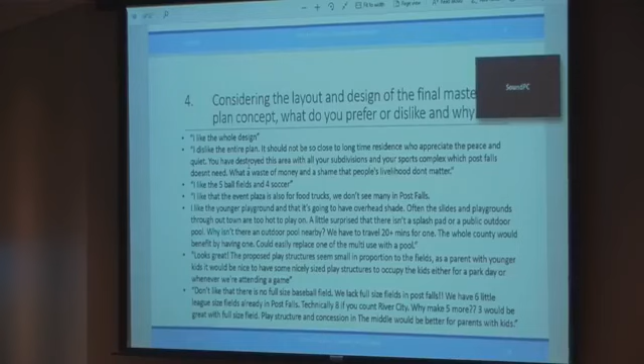Shelters at 7%, and the event plaza at 7%. So what I tried to do is, and this is included as an appendix to the whole master plan with all of the quotes and comments we got from everybody that responded, is pick a short list of comments on considering the layout and design of the final master plan concept.

The first comment I put is, I like the whole design. However, the second one is, I dislike the entire plan. So you can see the range of comments we got. People were not afraid to tell us exactly what they think.

Some of the comments related to how close this complex would be to existing residential and the relationships as well. So that's a concern.

I like the 5 ball fields and 4 soccer fields. I like that the event plaza is also for food trucks. We don't see many in Post Falls.

And then we get comments about, you should build a pool, which I'm sure you guys hear all the time. All the other things you've heard during your master planning for your parks and recreation master plan process came through in this as well.

One of the comments was, and we wrestled with this in the design, that there's no full-size baseball field. So we wrestled with what this complex should be, and as we worked with staff, we came down to 5 youth baseball softball fields.

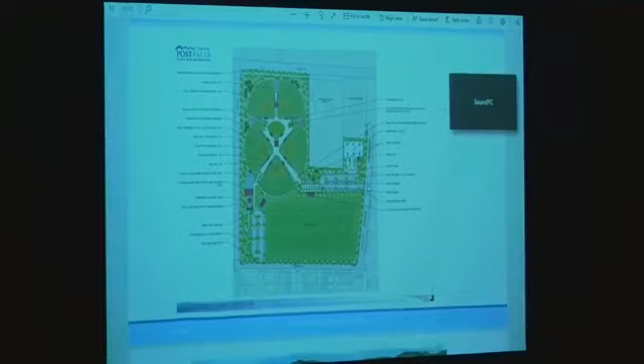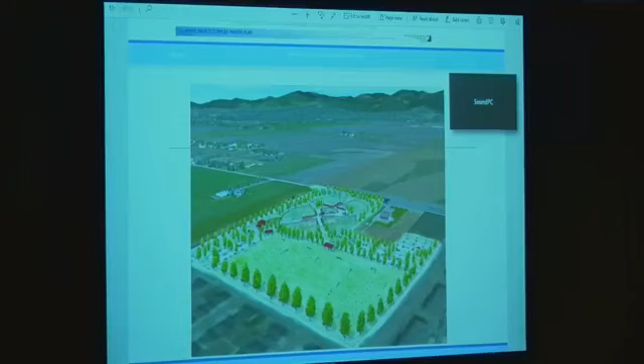This gives you an idea: Prairie on the north, fitting into this slope on the north and west, and the fields across the south with the existing residential neighborhood looking out onto the fields, and then the apartment complex here also looking out on the fields, with the main portion of the activity, at least for the baseball and softball fields, up here in the northwest corner.

So a little bit more detail. The way we've designed the master plan right now, the 5 baseball and softball fields all have synthetic turf infields. We've estimated it that way.

One of the things that does is extend the season, both on the front end in the spring and the back end in the fall. It makes it so you can have practices earlier in the year, and also reduces the maintenance turnaround time between tournament games. So if you have a late afternoon thunder shower or something, it's easy to get right back on and play without having to prep the infield. That's one of the things we did.

Each of the 5 fields are 225 feet to the outfield. They're set up to have 60-foot and 70-foot bases, so we have flexibility for different age groups.

And then again, the ADA inclusive field is in the center. We're showing net backstops so that the visitor and fan experience isn't looking through a chain link fence like in a lot of situations. The net is a lot easier to see through.

Restroom concession stand, I'll show you the details on that. We're really excited about how the architecture and character of the complex are coming together.

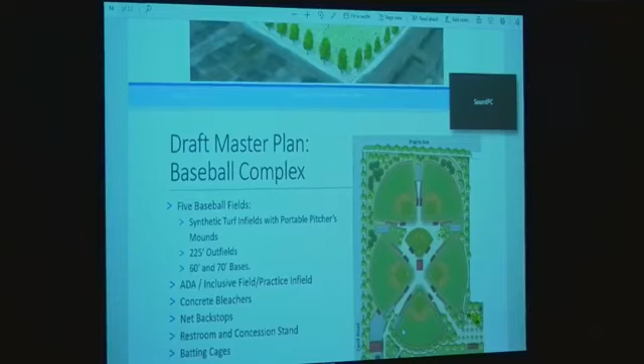Again, batting cages and bullpens, which I mentioned before. So you really have this full tournament experience. You can go there, practice, warm up, have that tournament experience, and stay put for the tournament.

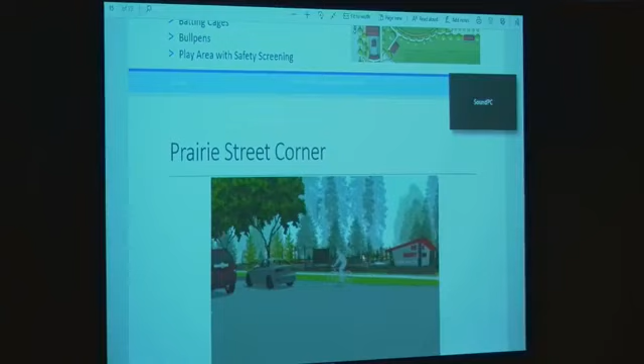This is what would potentially be the corner of Cecil and Prairie on the northwest, with a sign. You can see the flag in the background. It's sitting below, so everything drops off down into the complex.

This would be the main entrance into the complex, and then you come through here and turn into the main entry. This is the concession restroom stand, the restroom shelter building on the soccer fields. The soccer fields are here on the left.

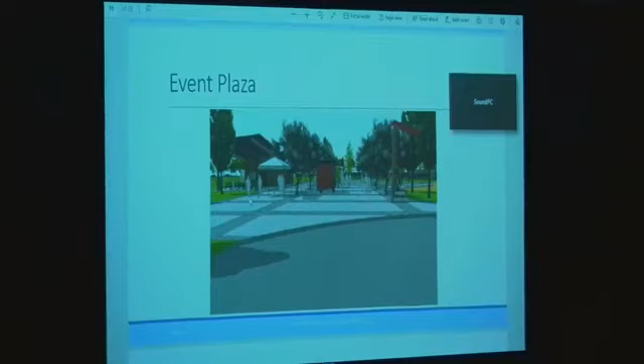This would be the main formal entrance into the complex, giving you an opportunity to really make a statement at the entrance into the softball and baseball component. It gives an opportunity for naming rights, advertising, and things like that, but also gives the fans and players this experience: I'm going someplace special, I'm entering a complex that's built for us.

The restroom concession stand is the centerpiece. It's got a shade shelter structure on one side, a fully developed concession stand—not to make food from scratch, but also to support folks staying and operating there. The restrooms are set up with flexibility so that through maintenance and operations, it can be maintained efficiently.

We've also included concrete bleacher seating to make it kind of permanent seating, to make it feel like you've gone to a full-size park, again with the net backstops.

And then the soccer fields. The great thing about the way this is turning out is this is the great portion of the site. The challenging portion of the site is under the baseball field. We've been able to...

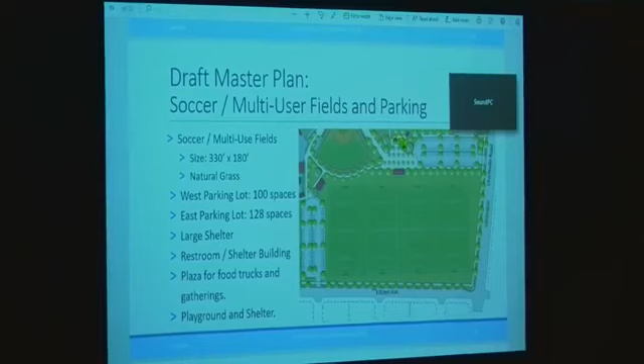That gives you a look at the lot in the southeast corner. So we've minimized the amount of parking lot frontage on Killdeer with all the cars parked so that they're not looking into the neighborhood. So really the neighborhood is maximizing their views looking out into the green fields of the soccer and the multi-use fields.

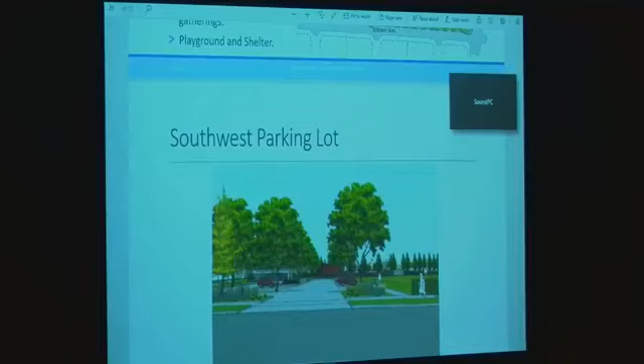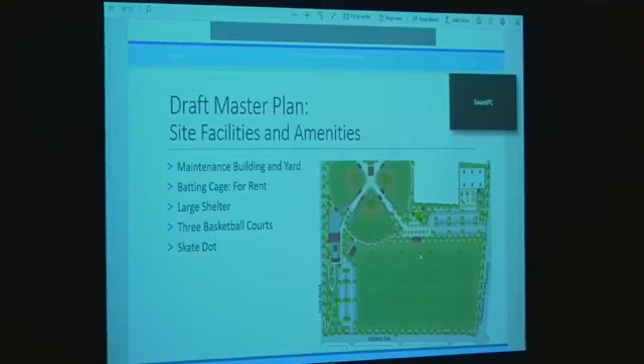So maintenance building and yard, again, batting cages for rent, basketball courts, skate, giving that opportunity for not only a tournament complex for things happening in practice, but also as an asset to the neighborhood as well. This is where kids can walk and bike to this complex and use these facilities when they're not being used for tournaments or for practice.

So really quickly going into the building, we worked really hard with staff to come up with a configuration, the concession stand, and an architectural character that we think fits with the style of the historic architecture of the farm buildings on the prairie, and also kind of the industrial feel of what the quarry was. So we're trying to pull all those together to have durable, timeless, and simple buildings that really create a character. And so that's why the shed roof comes out over the top.

We have shade in here with picnic benches available. The concession stand runs across the full front of it, and then we have 2 unisex restrooms. These restrooms could be open when there's lower use of the facility, and the men's and women's restrooms could be closed. So you don't have to have all of your restrooms open all of the time and have to be cleaning them.

And then we created an office so that as you attract tournaments or tournament management from other people maybe outside the city, or even the city operating a tournament, there's an office for the tournament management to set up. So they keep track of the scheduling, they keep track of the changes and registration, and that gives them a place to set up. And then the important things like janitorial and mechanical storage as well.

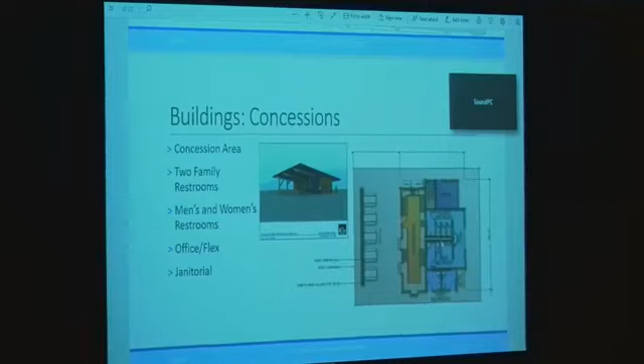The restroom facility out by the soccer fields, again, we have a small office so that tournament management could occur in there, because sometimes soccer is operating when it's rainy and miserable, so it gives tournament management a place to set up.

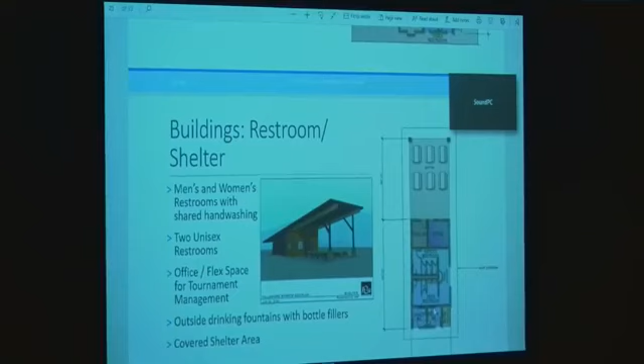We have a shelter on the side that's facing east so that there's some shade and maybe some rain shelter as well. And then again, we've set it up with a couple of unisex restrooms and full men's and women's restrooms, that these could be closed off normally except when there's tournaments, and then these are open so that they could be used, again, minimizing that ongoing day-to-day maintenance.

We have a concept also for the maintenance building, which would serve not only this complex, but it's envisioned to serve the northeast component part of the city as well. So there's a lot of maintenance equipment that would be located here, to reduce the drive times.

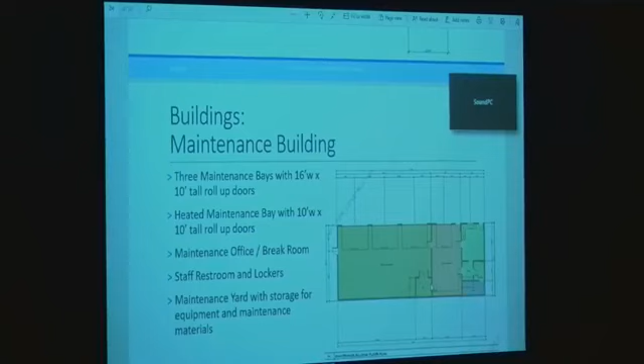And it would be a year-round facility, so that there would be one maintenance bay that would be conditioned and heated so that work on equipment could occur during the winter, and then some unheated areas. And then management, office space, some locker rooms and a restroom, and also storage for a lot of different things that are needed in this facility.

So that brings us to the overall estimate. It's very similar to what I shared with you last time I presented. I know everybody's going down to the bottom line already. So everything we've talked about today is included in the estimate, but there's a few things I want to point out that are really big components of the complex.

One is the frontage improvements on Cecil and Prairie. If you were building a complex where the streets are already done, you wouldn't have an expenditure of about $1 million to improve those streets. So that's one of the budget challenges as well.

Another challenge is, in order to get water service for this site, because it's not on City of Post Falls water, the connection fee is going to be about $256,000. So that's another big component of the budget we had to work in.

This isn't a construction drawing estimate, we haven't detailed everything out. We have $14,413,940. So that includes all the offsite, that's everything - the A&E costs, the offsite improvements, that's everything.

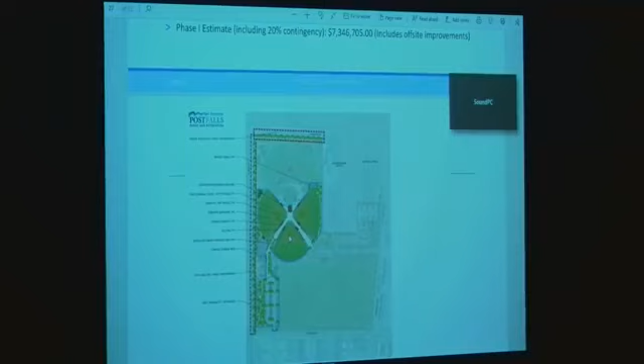One of the last components we looked at in the master plan is what cost recovery could be. Cost recovery is all about how much it takes to maintain the full complex. This discussion is about maintaining and operating a full complex - all 5 fields, 4 soccer fields, all the parking, everything together - it's the maintenance operations against what revenues we project could be gained by operating the complex.

So the assumptions are you're utilizing the complex, the 5 fields, the soccer fields, as well as we think they can be right now at this point in time. It's a little hard to estimate what the demand could be in the future. We know houses are being built every day, more people are moving to the community, but we're trying to take a conservative approach to the opportunities for revenue growth in this.

So we looked at the revenue, and we came up with baseball being able to get about $47,000 a year over, and we've got about a 7-month season. There's a lot more detail that goes into this.

And then we looked at soccer, that should be soccer instead of softball, at $108,000 is the next one. One of the things about soccer is that it's higher because there's more opportunity for revenue growth on the outsides of the season. There's a lot more flexibility, and you can put a lot more kids on the field, so there's more opportunity there.